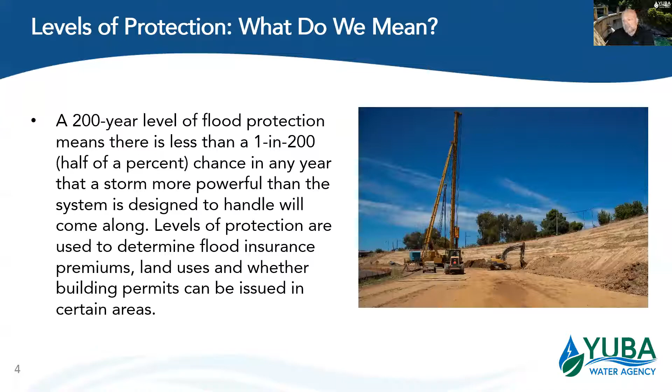So, Yuba County flood history. I think everyone here knows that we are surrounded by three major rivers: the Yuba, the Feather, and the Bear Rivers. In a lot of respects, our region is defined by these rivers, and it can be easy to forget about how productive and flashy they can be, especially in the winter months.

There have been more than 30 major flood events in the Sacramento Valley between 1805 and 1997. That flooding was only exacerbated by the accumulation of silt from the historic hydraulic mining operations in the mountains above us. In fact, the Yuba River was at one time deep enough to accommodate steamships at Marysville, but debris from hydraulic mining eventually raised the riverbeds in some places higher than the city of Marysville itself, if you could believe that.

But to defend against this threat of flooding, our predecessors built levees to protect the community, but they were kind of built in a piecemeal fashion. They did their job, but they obviously could have been better. Being that they were better than nothing, there was a lot of room for improvement in terms of engineering standards, and they didn't always hold the water back as intended. Slide, please.

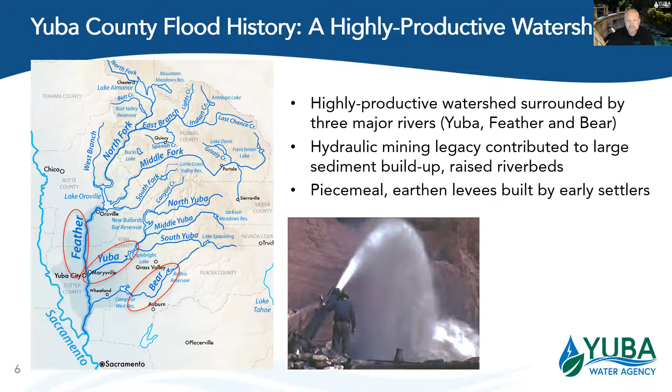Yuba County's flood history has been documented since record keeping began in the late 1800s. But really, Christmas Eve 1955 was the catalyst for the Yuba Water Agency and the Yuba River Development Project. This project was responsible for constructing the new Bullards Bar Dam just above Dobbins on the North Fork of the Yuba River in Yuba County.

Although this project was not without controversy in the years leading up to it, the 1955 flood that threatened Marysville and much of Yuba County, and caused tremendous damage and loss of life in neighboring Yuba City and Sutter County, was a sobering reminder that motivated the people of Yuba County to take flood control into our own hands. Although this project was conceptualized in the years leading up to the flood, it literally took hell or high water to muster the resolve to construct this enormous and unprecedented local project on the Yuba River.

On a personal note, every Christmas my grandmother recalls the story of when her family was evacuated from their home on Diver Street in East Marysville to the downtown Hotel Marysville. She remembers watching the army of volunteers who gathered to save Marysville from the hotel window, knowing that her dad, my great-grandfather, was one of the men filling and stacking sandbags on the D Street Bridge. It's kind of funny in hindsight, but she also recalls her childlike worry of Christmas ruined, and insisting that her parents move all the gifts from under the Christmas tree to the top of the coat closet before they left home that night.

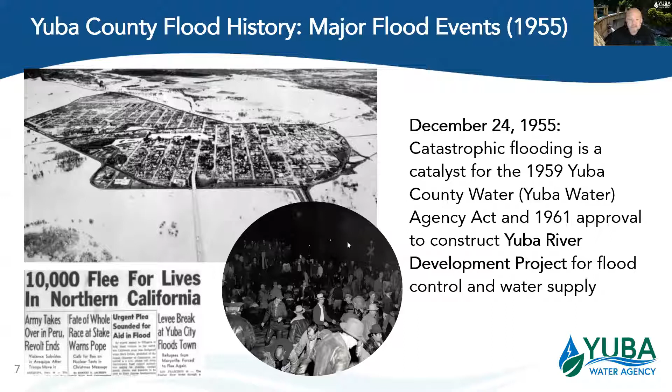Another important flood event occurred in February of 1986. As I mentioned, water on the levees is nothing new in Yuba County, but as the overflowing river started to recede from what seemed to be an endless rain that winter, a 150-foot section of the levee near present-day Walmart crumbled and caused catastrophic flooding to the community of Linda, which ultimately killed 2 people and destroyed 4,000 homes and businesses. What I really like about the picture in the slide is what was once the Peach Tree Mall still stands as a reminder of how a local economy can be devastated in less than a day.

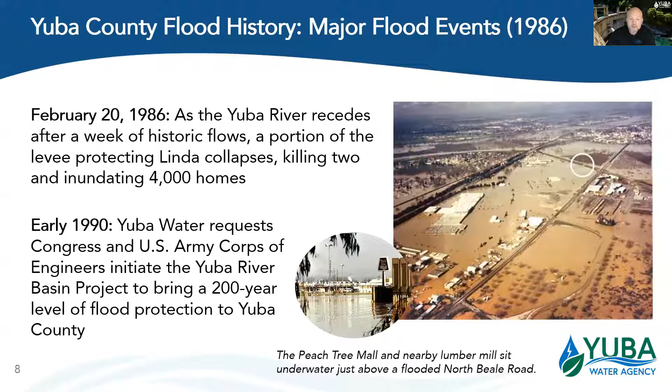Moving forward a little bit, in 1990 Yuba Water requested Congress and the U.S. Army Corps of Engineers to act and help bring 200-year level of flood protection to Yuba County. The devastating flood of 1986 was the catalyst for the $500 million Yuba River Basin project, where the Corps of Engineers, DWR, and the Central Valley Flood Protection Board endeavored to repair and construct more levees to mitigate this risk.

And finally, that brings us to January of 1997. Who here today remembers when El Nino, La Nina, and Pineapple Express became household names? Just after the new year, an atmospheric river melted a near record snowpack and created a devastating amount of runoff in Northern California. All that water coming down the western slope of the Yuba and Feather rivers quickly overwhelmed the system and caused multiple levee failures in the Central Valley.

Near present-day Plumas Lake, a section of levee on the Feather River failed, claiming 3 lives and nearly 1,000 homes, further emboldening the Yuba River Basin project, which received congressional authorization and paved the way for many projects we see today.

This was the second time my family evacuated to the foothills to escape floodwaters, and it impacted me so deeply that even today the term 'the next time we evacuate' is factored into our household planning 24 years later.

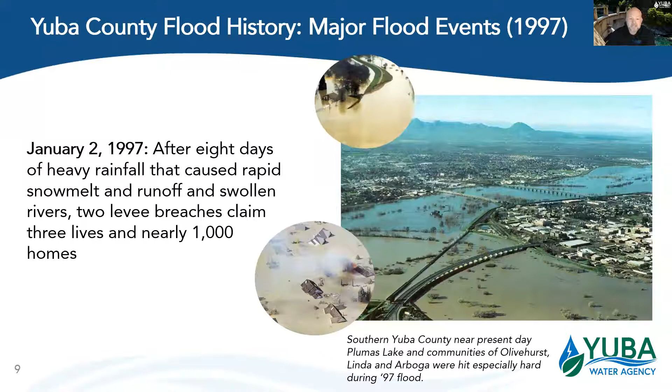Now that I've set the stage for some of the risk, let's dive into some of the things we're doing right now to help mitigate that risk.

One of the main missions, or core principles, of the Yuba Water Agency is flood risk reduction. And like any mission, it takes good planning and key partners to put that plan into action.

As we move forward and streamline our flood risk reduction program, there are 5 initiatives that encompass the projects Yuba Water is currently invested in, which will continue to get us to 100 and 200-year levels of flood protection. These goals are: achieving a 200-year level of protection for urban areas and a 100-year level of protection for agricultural areas throughout the county; identifying the status of current and ongoing flood risk reduction projects; identifying opportunities for coordination and unifying smaller improvement projects for increased efficiency; developing a long-term plan that identifies various needs and opportunities to further reduce flood risk to the county; and developing a long-term plan to complete the construction and repairs to achieve that reduced risk.

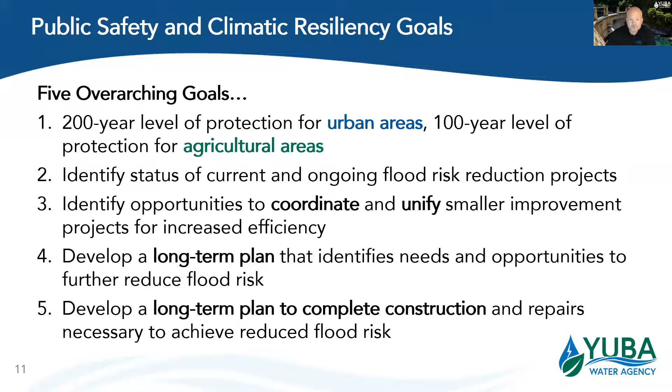So when it comes to levees, many people might not realize that Yuba Water doesn't actually own or operate any. In reality, the levees in our area are owned and operated by various local jurisdictions and reclamation districts. Our role has really been more to collaborate and partner with these agencies, and more importantly, help them build the funding needed to improve these facilities.

Some of our local partners include the Three Rivers Levee Improvement Authority, the Marysville Levee Commission, and Reclamation District 784, 10, 817, and 2103.

I would be remiss if I didn't also acknowledge our state and federal partners at the Central Valley Flood Protection Board, the Department of Water Resources, and the U.S. Army Corps of Engineers.

So the agency and its partners have and continue to work hard to help make sure our county is protected from floodwater. Our community is very fortunate to follow in the steps of forward-thinking leaders who have carried the torch to protect our county. And through these partnerships, we have leveraged over $500 million in state and federal funding to build projects to improve the safety of Yuba County.

So just a real quick summary of some of the things we have in numbers. We have 2 ongoing flood risk reduction programs, 13 flood risk reduction projects that are complete or in construction, 3 studies that are well underway, and 4 projects that are in the planning or design phase. These are all projects that are real and tangible efforts to further reduce the risk of flooding. That's not to mention the projects that our partners have already completed.

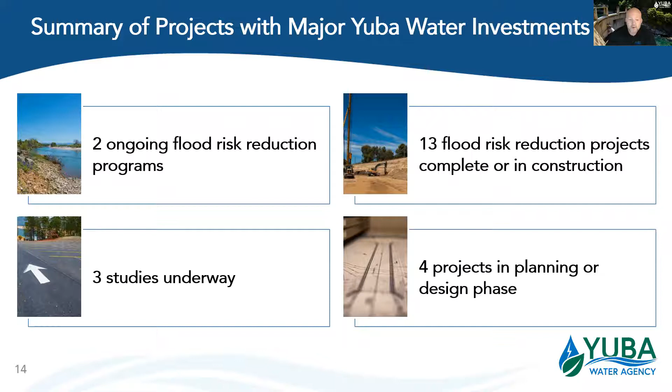For those of you living in South Yuba County, you might be aware of the Bear River and Feather River setback levees constructed by the Three Rivers Levee Improvement Authority and maintained by Reclamation District 784. The Bear River setback levee was completed in 2007, and the Feather River setback levee was completed in 2010. These 2 levees are part of a larger system designed to bring a 200-year level of flood protection and lower the flood stage by 1 foot on the Bear River and 3 feet on the Feather River. It's pretty substantial.

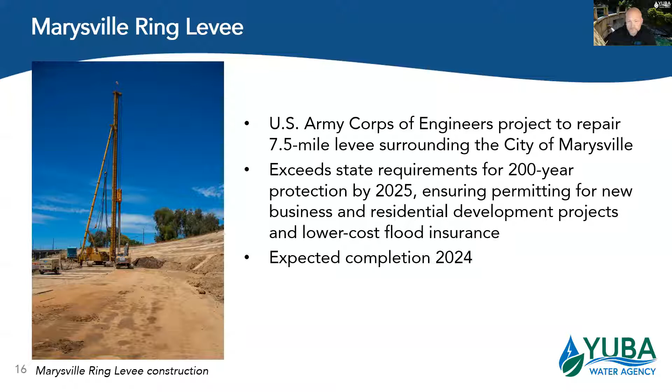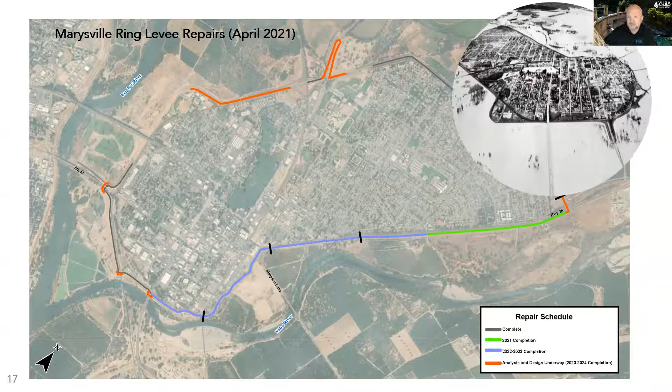The Yuba Goldfields levee is another critical project for the county, and this will help us achieve that 200-year level flood protection as well. The Three Rivers Levee Improvement Authority is currently wrapping up a new levee that will extend along Hammonton-Smartville Road to high ground near Beale Air Force Base that will protect against potential breaches out in the Goldfields.

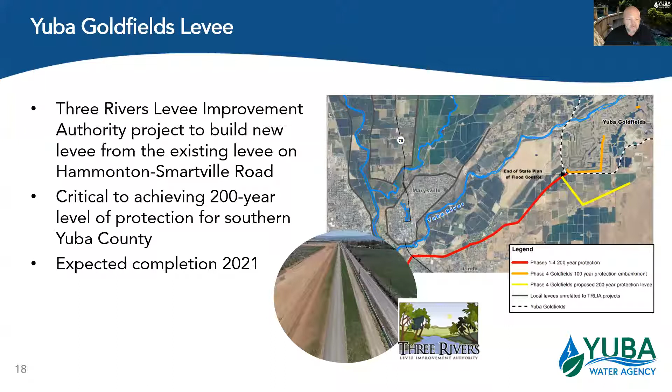The Bear River setback levee is another setback levee on the Bear River west of Wheatland and will repair critical erosion damage in several pipe crossings. We expect this project to be complete in 2022.

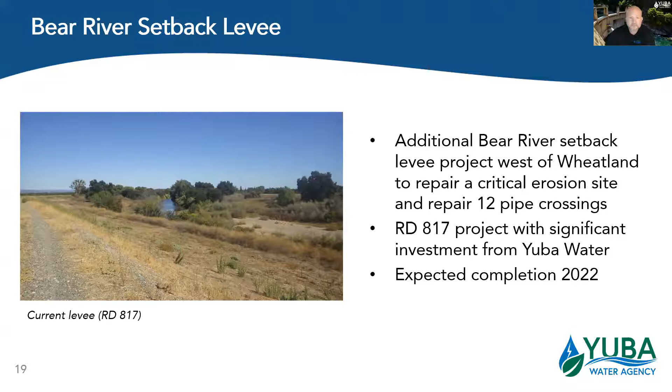The Hallwood Side Channel project will remove 3.2 million cubic yards of sediment from the lower Yuba River and will lower water surface elevations and velocities during high water events to reduce stress on levees. Additionally, this project will enhance 157 acres of natural habitat to restore historical floodplain processes, really making it a win-win. This project is interconnected with the North Training Wall project, and because Teichert is a partner on this, I also want to recognize their $72 million in-kind service, which really is an enormous advantage toward getting this critical project done. That's huge. This project wouldn't be possible without that in-kind service.

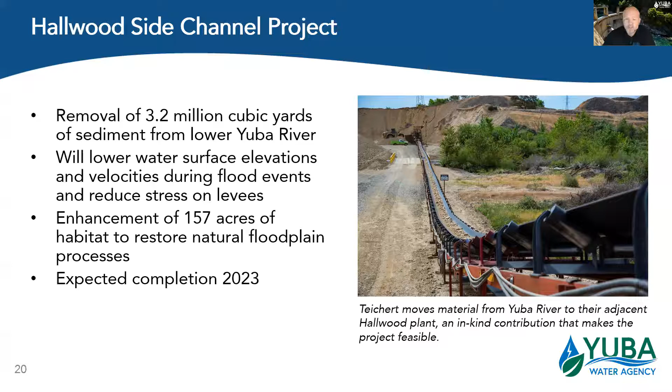This slide also shows the progress of the Hallwood Side Channel project, which you can really see the magnitude of sediment removal from the before, during, and what it's going to look like after. So it's really a heavy lift out there.

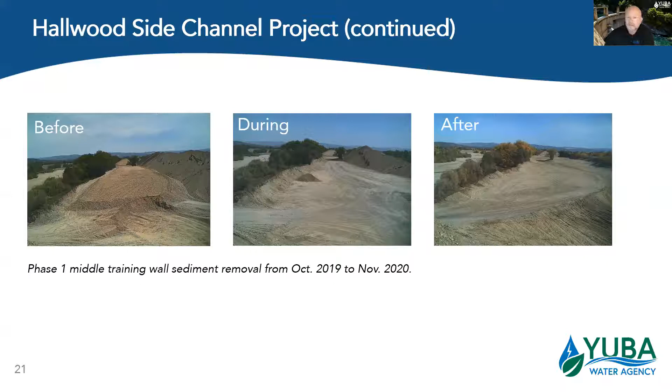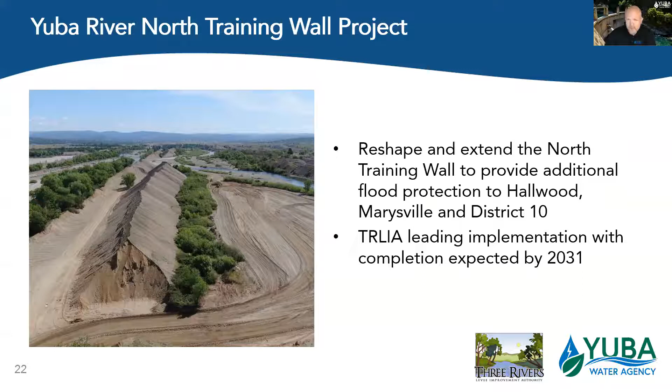The North Training Wall project, as I just touched on, this is really closely tied to the Hallwood Side Channel project. This is a project being undertaken by the Three Rivers Levee Improvement Authority, and it's going to reshape and extend the North Training Wall to provide additional flood protection to Hallwood, Marysville, and District 10. This is all occurring in the same area just below Daguerre Point on the Yuba River, and we expect it to be done by 2031.

In addition to the projects I just talked about, and some of the smaller projects we didn't list, there's a lot going on right now. We're also collaborating with our partners to develop the Bear River Corridor Management Plan, the Feather River Management Plan, and the Agricultural Floodplain Task Force.

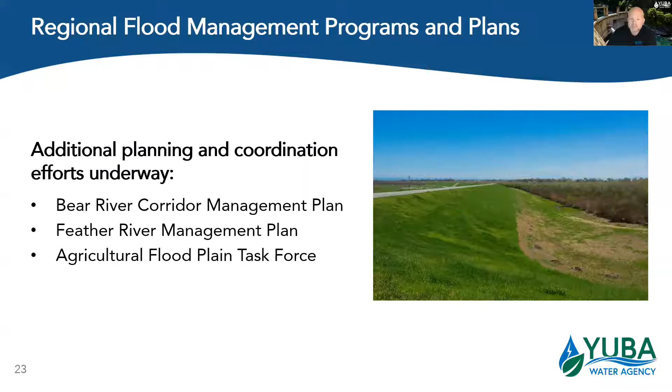This is one of my favorite slides because it illustrates the many projects that Yuba Water's invested in toward achieving that 200-year flood protection for urban areas and 100-year flood protection for agricultural areas. In addition to the safety of Yuba County, our economic prosperity is at stake as well. It's important to know there's currently legislation in the state to prohibit building in the floodplains with less than a 100-year level flood protection. So these projects are helping the county prepare for those limitations.

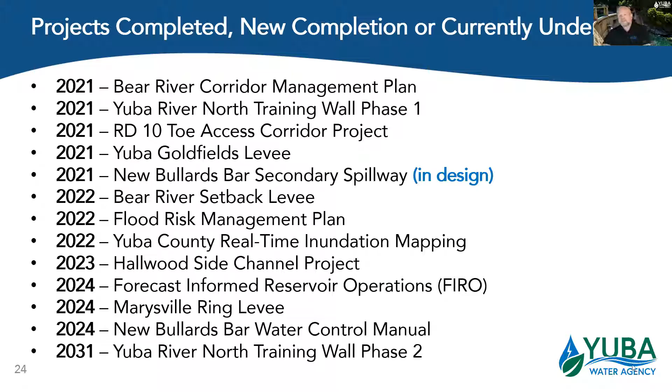So I think the last handful of slides have given a pretty broad brush view of some of the projects intended to help protect us from high water. However, my colleague, John James, who is the Water Operations Project Manager at Yuba Water, is working on some really awesome projects that will put the agency at the tip of the spear and possibly even give us the insight and ability to respond to floods before they even occur. Mr. James?

Thanks, Brian. I'm John James, and I'm the Water Operations Project Manager for Yuba Water Agency. As Bonnie mentioned, my background is in atmospheric science, water management, and hydroelectric operations. I manage many of the agency's operational flood risk reduction programs that I'm excited to share with you today.

For background, I wanted to first talk about the Forecast Coordinated Operations Program, known as FCO, and the agency's involvement. Following the 1997 floods, studies were conducted and recommended improvements in coordination of the flood operations between New Bullards Bar and Lake Oroville. This led to the creation of the Yuba Feather FCO program, with Lake Oroville and New Bullards Bar Reservoir operating in coordination to improve flood protection within the Yuba Feather River system.

Since 2005, the FCO program has been a successful partnership in achieving the objectives of operating the reservoirs in a coordinated fashion to reduce flood risks, enhancing communications for downstream flood emergency needs, and providing a common decision support system. This strong partnership between local, state, and federal agencies, including Yuba Water, DWR, the U.S. Army Corps of Engineers, and the National Weather Service, makes the program highly collaborative and has been key to its success. This program has provided the foundation for the future flood initiatives and enhancements the agency is working on.

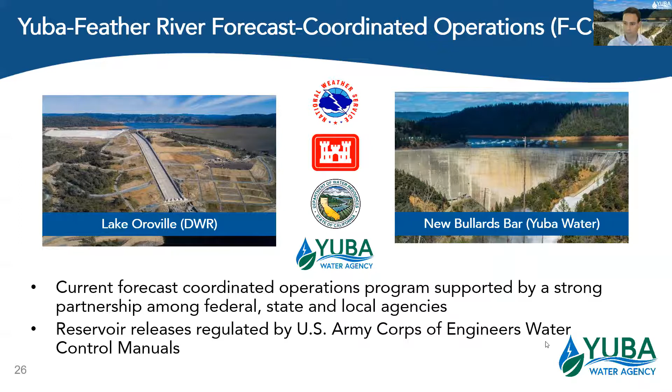This slide is showing the geographic representation of Lake Oroville and New Bullards Bar Reservoirs and the Yuba Feather system in relation to the downstream locations that are impacted by their coordinated operations, including the cities of Yuba City, Marysville, and others within Yuba County. The primary drivers for the coordination are the operational flood flow limits from the confluence of the Yuba and Feather rivers down through the confluence of the Feather and Bear rivers.

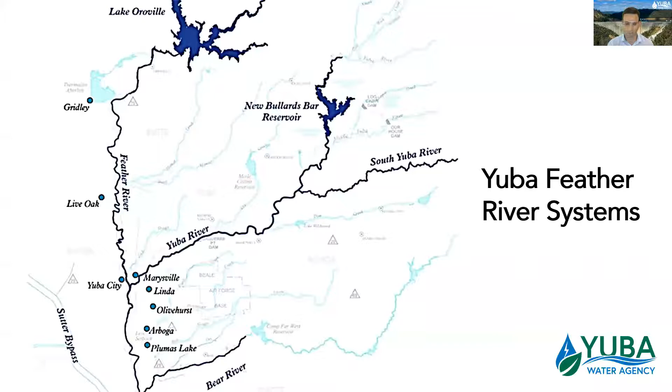In 2019, in order to continue to enhance the strong partnerships and flood risk reduction efforts the FCO program created, DWR and Yuba Water invested an initial $2 million in a new initiative called Yuba Feather Forecast Informed Reservoir Operations, or FIRO. You may have been hearing a lot about FIRO lately, but what is FIRO? FIRO is broadly defined as a flexible water management approach that uses data from watershed monitoring and improved weather forecasting to help water managers selectively retain or release water from reservoirs.

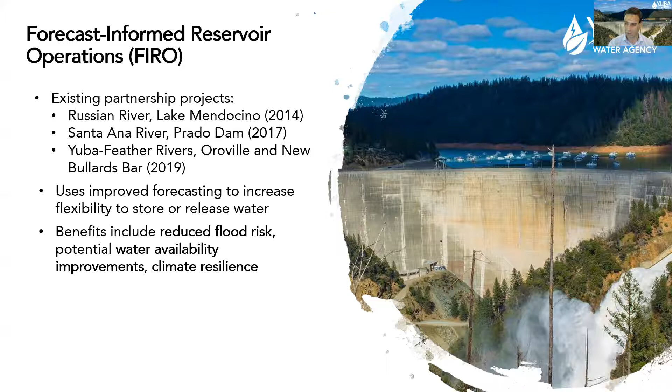It really supports decisions about how much water to keep during dry periods or how much to release prior to storms. The Yuba Feather FIRO project is the third FIRO project within California and is unique in a few ways. It's the first FIRO program to primarily focus on flood risk reduction, and also the first to utilize FIRO in a multi-reservoir system. Sonoma Water Agency and Orange County Water District also have FIRO projects currently in place.

The focus of the Yuba Feather FIRO program is primarily on flood risk reduction, but it also has the potential for water supply benefits. The program seeks to achieve two main goals: one, to improve operational meteorological and hydrological forecasts, and then integrate those forecasts into improved reservoir operational rules for flood risk reduction and public safety.

FIRO established a new partnership with Scripps Institution of Oceanography Center for Western Weather and Water Extremes, or CW3E. CW3E specializes in state-of-the-art research into atmospheric rivers, which are the main type of storm that causes large flood events in our region, and as Ryan pointed out, were the cause of some of the historic flooding in 1986 and 1997.

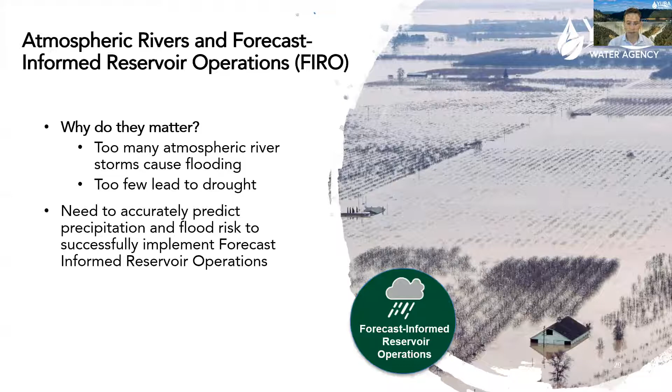So what really are atmospheric rivers, and what do atmospheric rivers have to do with FIRO? Well, it turns out in California, and specifically in our region, being able to accurately predict atmospheric rivers is the key to successfully implementing FIRO. Here's a brief video from Scripps that explains a little bit more on atmospheric rivers.

Hey, John, just a second. This is Bonnie. Thanks, Bonnie.

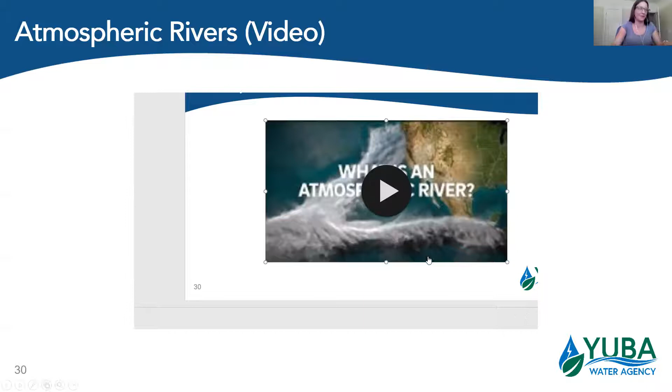John, I think we may be stuck on this slide, so we might need to move on. Sorry about that. Yeah, that's no problem. I think we can include that in the links later on.

But atmospheric rivers are essentially large rivers of water vapor in the sky. They contribute to over 90% of our floods in the region and can provide up to 50% of the water supply. They can carry as much water vapor as 25 times the Mississippi River, and historical terms like Pineapple Express refer to specific types of atmospheric rivers.

So working closely with our partners at Scripps, the Yuba Feather FIRO partners are focusing on improving atmospheric river forecasts in several ways specific to our area. These include new permanently installed weather and soil moisture stations. Since the program started in 2019, we've added 7 additional stations in the watershed, and 5 are currently transmitting real-time data. It also includes weather balloon launches called radiosondes during atmospheric river events.

We have established a launch site just east of Marysville at one of our facilities that the Scripps team is using. It also includes observation flights over the Pacific Ocean by the US Air Force and NOAA using sensors called dropsondes to measure atmospheric rivers during their development. These are the same planes that are used to fly into hurricanes along the East Coast. All these observations feed into real-time global weather computer models, and this means they're already improving weather forecasts by adding additional and higher resolution data.

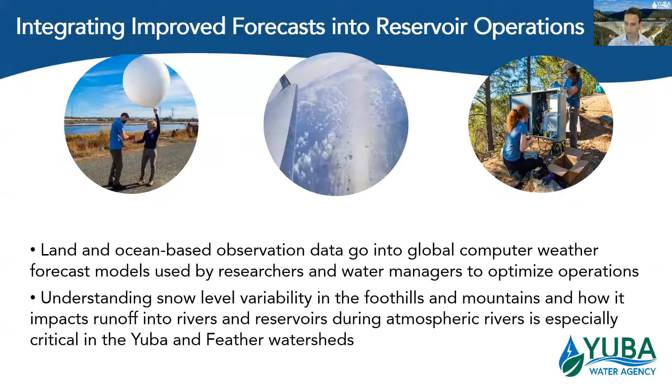So the formal reservoir flood operating rules for Oroville and New Bullards Bar fall under the Army Corps' water control manuals. These are the same rules that are used by the partners as part of the FIRO decision support system. Currently, the rules are primarily based on the time of year and generally do not include provisions to use specific forecasts to inform releases. So to integrate these new rules, Yuba Water and DWR are working with the Corps to support updating the manuals at New Bullards Bar and Lake Oroville.

Along with integrating FIRO, the manuals are being updated to be more adaptive and take advantage of improving forecasts now and into the future. The FIRO program and the updates to the manuals are being highly coordinated and aligned as they progress together in parallel.

This process of developing FIRO and water control manual updates at the same time is another unique aspect of our program. The alignment of the two programs in the Yuba Feather has been so successful, it's actually being envisioned by the Corps as the model process for future joint FIRO and water control manual update efforts. Next slide, please.

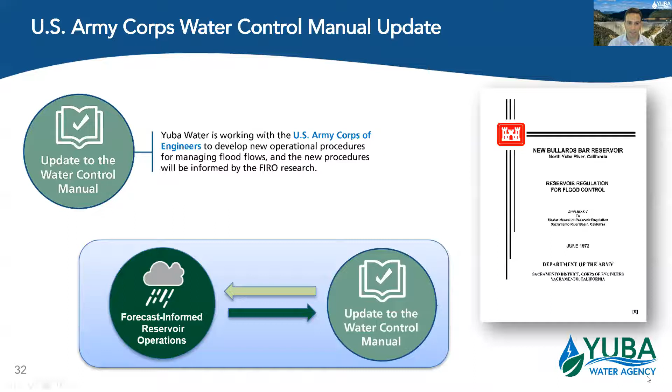So improved forecasts and operating rules are important enhancements. However, to achieve the full benefits of FIRO strategies, it requires the capability and flexibility to release water at the reservoir itself. Currently at New Bullards Bar, there's only one primary spillway outlet that is situated relatively high in the dam. During storm events, the reservoir must fill above the current outlet before water can adequately be released. This means that even with a reliable forecast, we may not be able to release the full amount of water we would like ahead of these large storm events.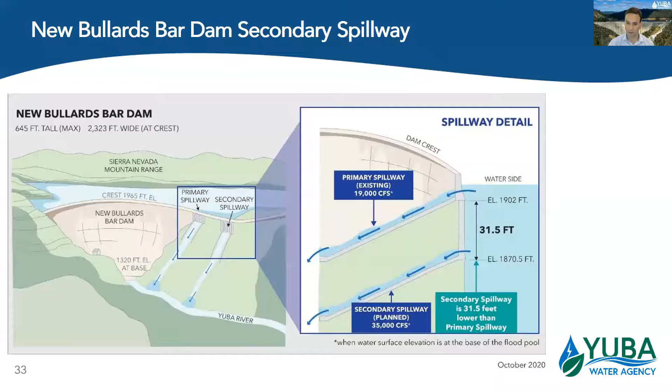Due to this, Yuba Water is planning a new secondary spillway designed to operate under FIRO, which will increase the flexibility in managing the reservoir. The spillway gates will be 31 feet lower in elevation, allowing for significantly improved release capability. The spillway will be able to create additional flood storage space ahead of flood events, which can then be used to hold back the flood flows during the peak. In fact, it will be able to release 35,000 cubic feet per second when the reservoir elevation is at the top of the conservation space. Independently, this doubles the current capacity at the same elevation.

Some of the benefits of the spillway include it being an additional and flexible outlet to pre-release water ahead of large storm events, the potential to reduce downstream water levels by an additional 2 to 3 feet, and this would increase the level of protection downstream between 100 and 300 years.

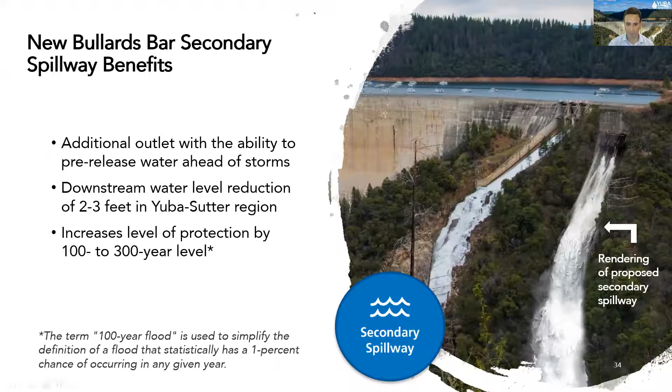This image is showing the approximate location of the new spillway, which is at the left abutment of New Bullards Bar Dam, adjacent to the existing spillway. It's actually near the overlook north of Marysville Road.

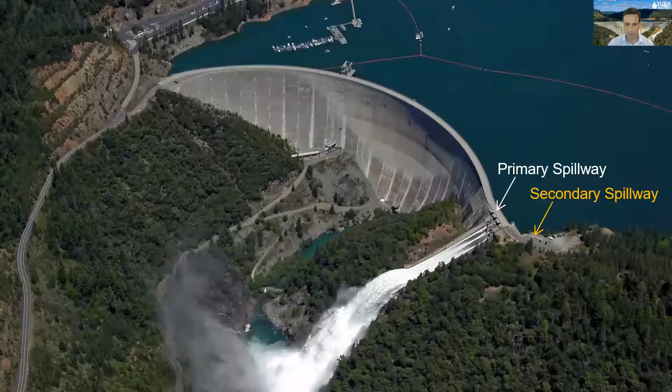Recently our design has progressed to a 30% milestone, and these are the current drawings of the spillway control structure and the spillway chute. The current design consists of 2 sets of gates, each with a vertical isolation gate for maintenance activities and a radial gate for regulating flow.

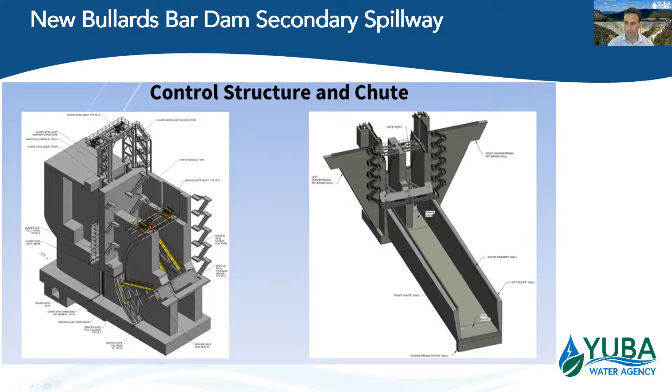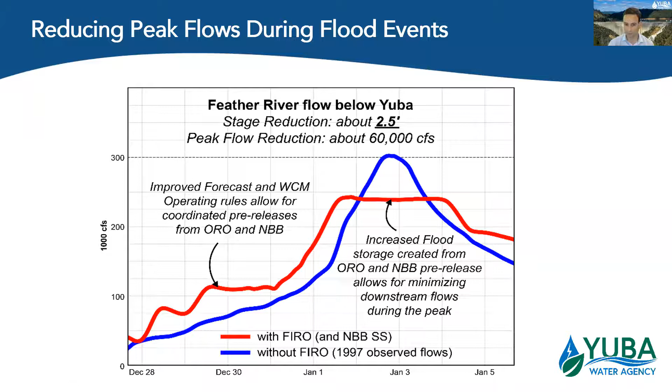As I mentioned, the planned spillway can reduce the magnitude and duration of stressful flows on the downstream system. As an example, this comparison shows the blue line, the actual flow measured at the Feather River below the confluence of the Yuba during the 1997 flood, and the red line, a preliminary simulation of the same event with FIRO and a secondary spillway under coordinated operation between Oroville and New Bullards Bar. As you follow the red line, you will see the increased amount of water released ahead of the main part of the storm, allowing for a decrease in the peak flows around the January 2nd and 3rd time frame when compared to the historical event. This illustrates there's a potential to decrease the peak river levels by 2.5 feet, dramatically reducing the flood risk.

So you may ask, why is lowering the stage level in the river important related to downstream flood protection? Stage reductions dramatically reduce the hydrostatic stresses on the levees. Historically, many levee failures have occurred not due to overtopping, but due to piping and undermining from the strains of water pressure in the channel. Lowering the river stage during the flood reduces this pressure and extends the effectiveness of the levee protection. This also supports the lifespan of the recent levee projects that Ryan discussed earlier in the presentation.

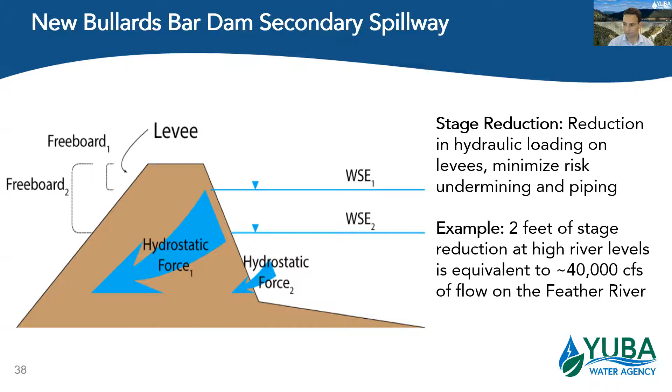So how is the secondary spillway important as it relates to climate change? On average, California already has the most variable climate in the United States. To illustrate this, we only need to look at the pattern of the last decade. From 2012 to 2015, California experienced one of the worst droughts since the 1970s. And in 2017, the climate pendulum swung the other way, and we had the most precipitation since records were kept in some areas of Northern California. Now in 2020 and 2021, California is entering another drought that could be potentially worse than the one we had only a few years ago. So what does this mean?

Well, climate change forecasts indicate that periods of wet and dry extremes may increase in magnitude and frequency. Essentially, the wet periods will be getting wetter and the dry periods will be getting drier. Overall, temperatures will likely become warmer, allowing for more precipitation to fall as rain versus snow, especially in flood events. Rain and warm winds at higher elevations during atmospheric rivers may contribute to additional melting of snowpacks, further increasing the flood potential. By using FIRO and the latest technologies in forecasting, the secondary spillway can release water days ahead of these large flood events, thus minimizing the impacts to downstream communities. It can also be used to better manage storage at higher levels in the reservoir during drier periods. The spillway really acts as a climate resiliency tool that, when coupled with FIRO operations, can help mitigate the impacts now and into the future.

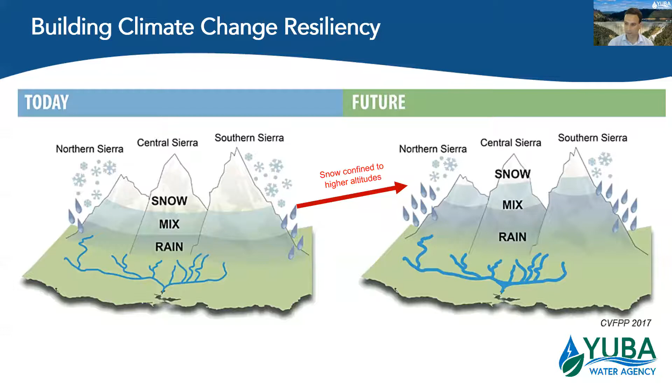The FCO program is the foundation for the new programs, regional partnerships, and future coordinated reservoir operations. In the future, FIRO operations of Oroville and New Bullards Bar through the FCO program will allow for the optimal use of this innovative water management strategy. The related efforts of the FIRO program, the updates to the Army Corps manuals, and the secondary spillway all act to enhance the FCO program and continuously improve the platform for decision-making and reservoir coordination. The many benefits include enhanced institutional partnerships, reduced flood risk, water availability improvements, and climate change resilience.

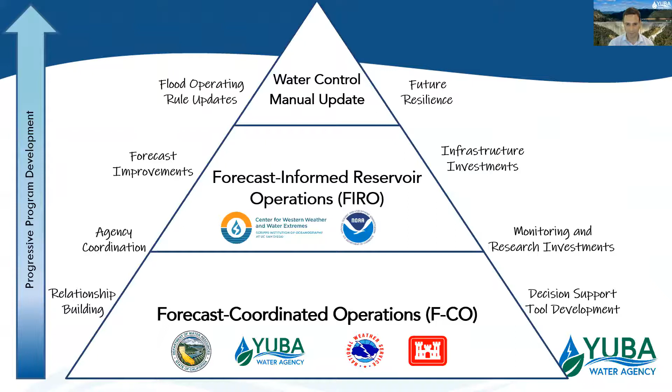A few additional projects I wanted to mention. The agency is partnering with Yuba County in developing a real-time inundation mapping tool. The tool will provide Yuba County emergency management personnel with real-time information on potential levee failures and the corresponding flood inundation. The project is currently in a feasibility study phase with the goal of being completed hopefully by next year.

This is another example of a state-of-the-art project to support public safety in the county related to flood risk. And finally, at Yuba Water, we're always looking ahead and taking proactive approaches to achieving and maintaining our missions. Envisioning flood risk reduction in the future, we've commenced a comprehensive flood risk management study to look forward to the next 5, 10, or even 20 plus years to identify and prioritize the next projects and additional steps we should be taking. This study will help further refine and update our strategic flood plan and ensure we are planning for the future of Yuba County.

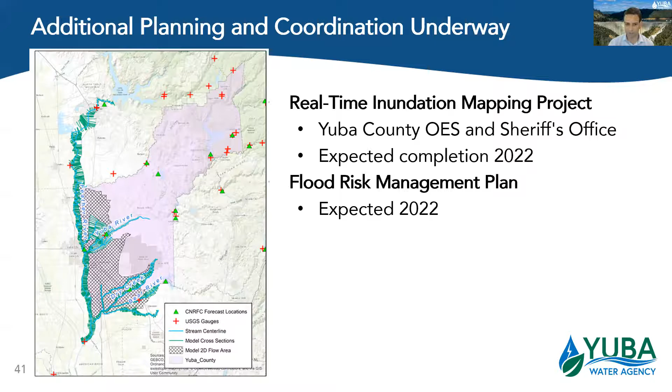So in summary, reducing flood risk for the people of Yuba County is a core mission of the Yuba Water Agency. Many programs, projects, and partnerships working together to advance the 100, 200-year level of protection and beyond. The current and future era of climate extremes calls for bold and long-term investments. This includes the planned secondary spillway at New Bullards Bar, along with the water control manual updates and the implementation of FIRO, and will significantly enhance our public safety and climate resiliency.